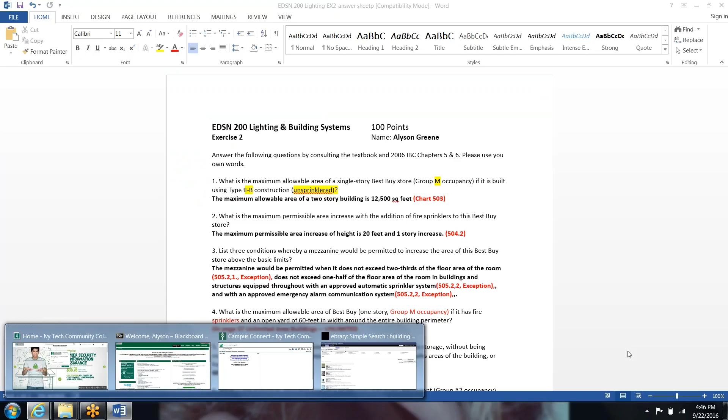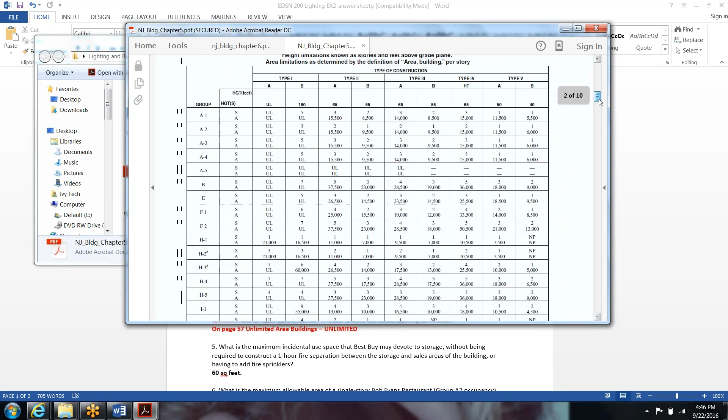So really the answer is just 12,500 square feet, and I used Chart 503. Chart 503 can be found in Chapter 5, given to us on Blackboard. You can see the numbers going up: 502, 504. Here's the actual chart, Table 503, Allowable Height and Building Areas.

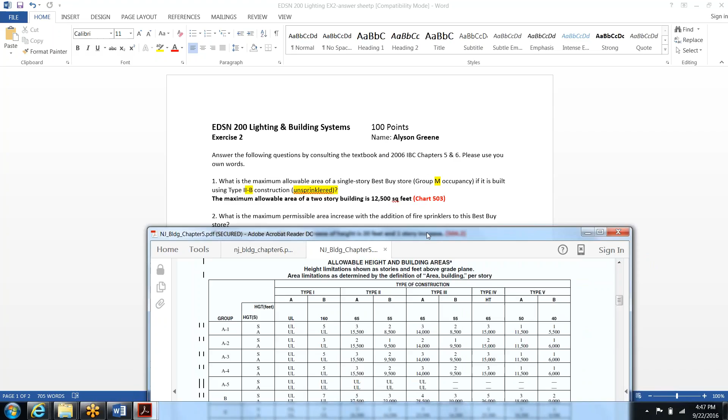So I'd look at my question: it's a single-story Best Buy Group M occupancy, built using Type 2B construction, unsprinklered. I'd come over to my occupancy group M, and pull it over to this column here with the 12,500. I got that because it's Type 2B, so I pulled that down and matched it up to where M came over, and there was my 12,500.

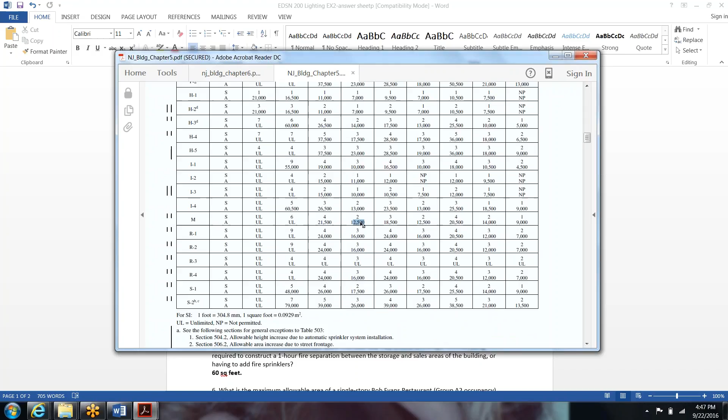On my digital copy of the Building Codes Illustrated, which I can get through eBrary from the links I gave you in a previous week, I'd come down to Chapter 5, Building Heights and Areas, since I'm working with Table 503. I'll give it some time to load.

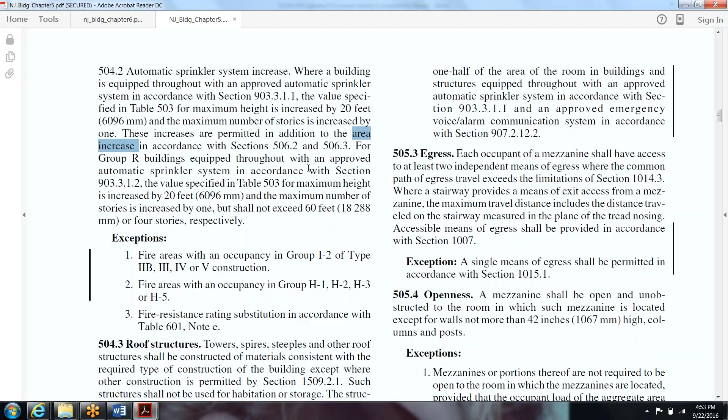So using the buzzword of the area increase, which was - if we go back to our question - what is the maximum permissible area increase with the addition of fire sprinklers to the Best Buy store? We'll follow along in our chapter book. Chapter 5, we see 506.2.

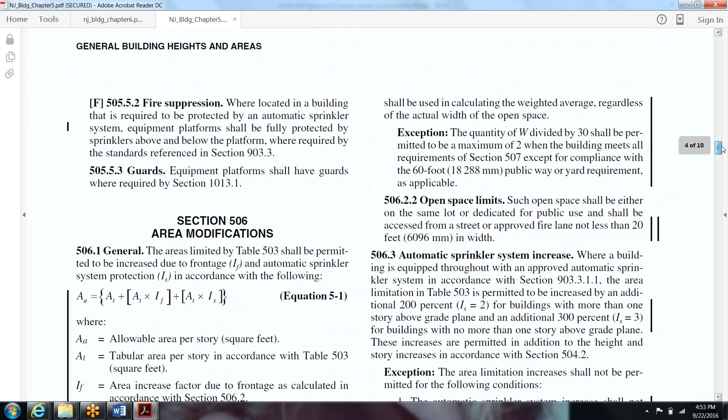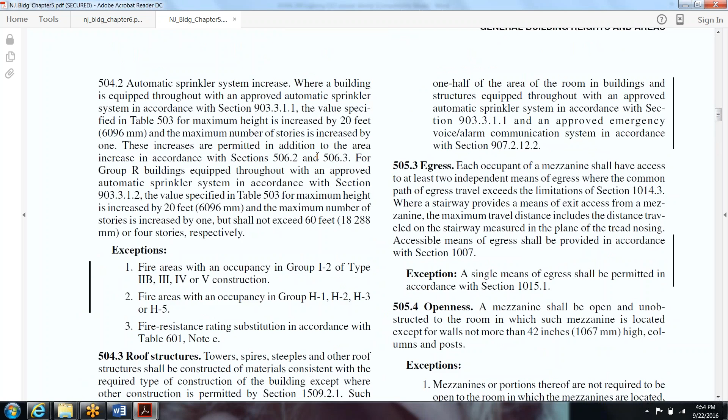So I'm going to follow through here. I'm only in 505.3, 505.4, so I'll keep going until I get to 506.2. So I see open spaces, then here's 506.3, and I think I just didn't read it - 506.2 and 506.3. So that's where my 506.3 comes into play.

If I'm scrolling down, it says, where a building is equipped throughout with an approved automatic sprinkler system in accordance with section 903.3.1.1, the area limitation is permitted to be increased by an additional 200% for buildings with more than 1 story above grade plane, and an additional 300% for buildings with no more than 1 story above grade plane.

So then when I see I have the words area increase, automatic sprinkler system increase, all in the same paragraph, and a bit of information about the stories given, it says for a 1-story building it'd be 300%. So I go back to look at my question.

All of that sounds like things I was looking for. So permissible increase with an addition of fire sprinklers to this Best Buy store, which was in fact a single story - so 1 story - the answer would truly be the 300% area increase, and these allowed for our height changes and story increases, but we don't necessarily care. It's still single story, so the true answer is 300% area increase, although all good information to know, and kind of a stepping through until we make it to the right section, which really is 506.3.

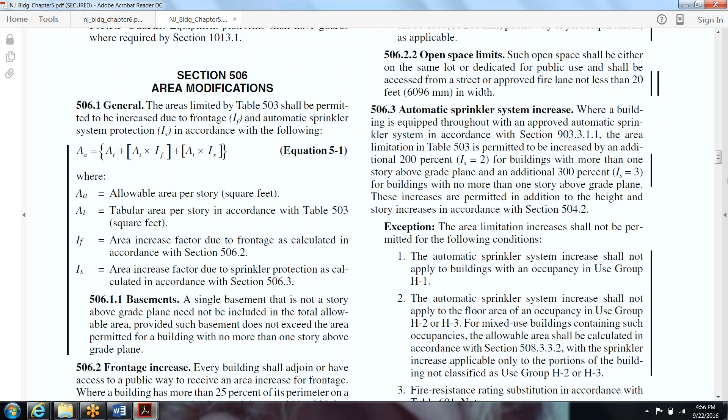In the announcements, I said the following questions can be omitted or the wording should change. So for 3, I said the wording should say: list 2 exceptions whereby a mezzanine would be permitted to increase the area. Looking then at my chapter 5, I'm hunting for the word mezzanine.

I can see that on 505, section 505 of the codes, mezzanines are clearly called out in bold font. And then I have a couple of different paragraphs—the first one says general, and the next one says area limitation.

So if I read back to my question, it says list 3 conditions whereby a mezzanine would be permitted to increase the area, and I said this really should be list 2 conditions whereby it would increase the area of the Best Buy. Coming back into here, I see area limitations, and then here I see exceptions to the limitation of area. So that's telling me there is an increase because it's an exception by which I'm allowed to have more area.

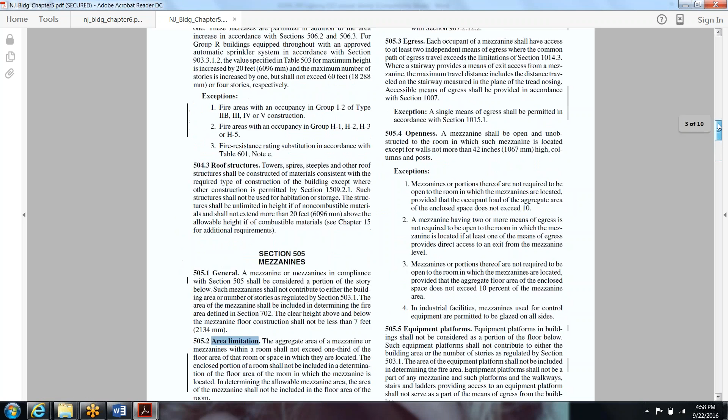Looking at the exception—sorry, I scrolled down past it. It's trying to skip pages on me.

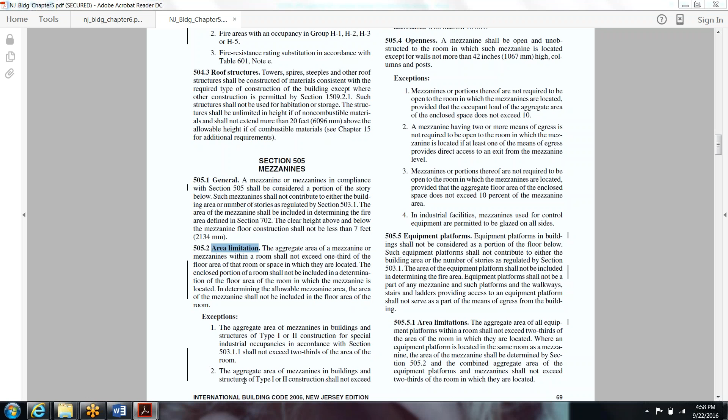I see the aggregate area of mezzanines in buildings and structures of type 1 or 2 construction for special industrial occupancies, in accordance with 503.1.1, shall not exceed 2/3 of the area of the room. The aggregate area of mezzanines in buildings and structures of type 1 and 2 construction shall not exceed 1/2 of the area of the room in buildings and structures equipped with an approved automatic sprinkler system in accordance with section 903.3.1.1, and an approved emergency voice alarm communication system in accordance with section 907.

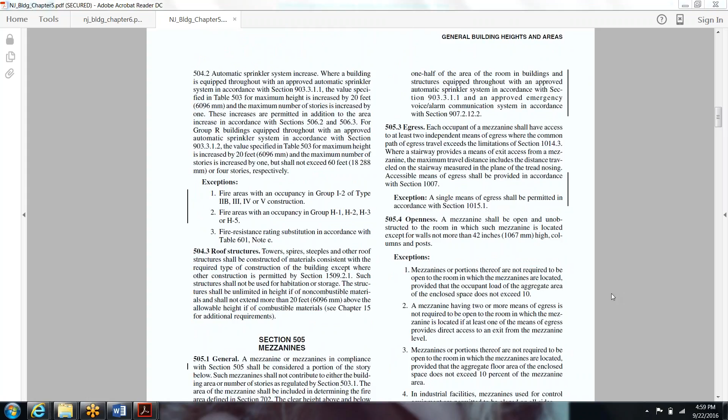So it's telling us these are the times in which there is an exception to this area limitation, when we have these special industrial occupancies in accordance with that section—it can have it, but shall not exceed 2/3 of the area of the room.

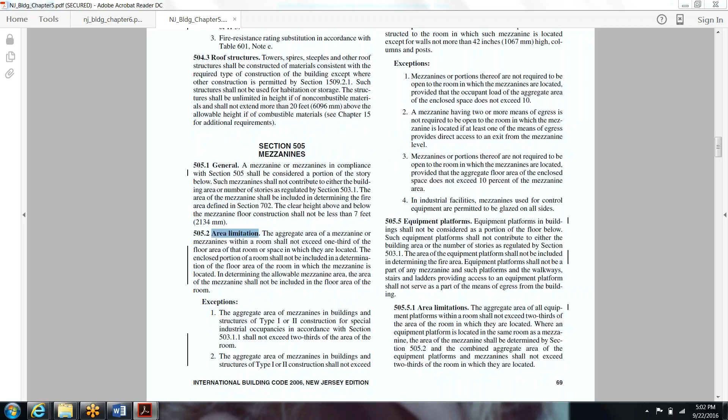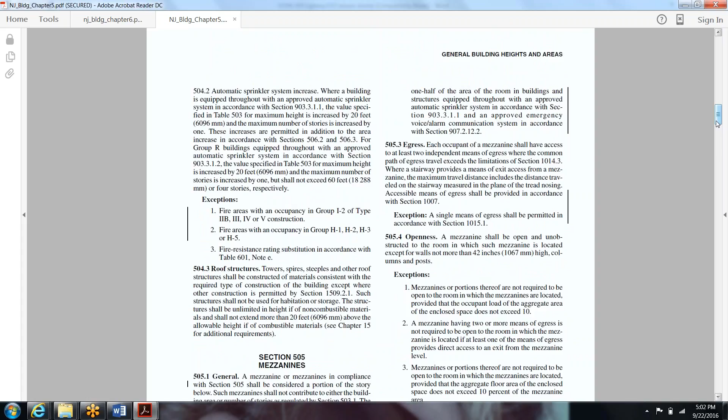And then for the aggregate area of mezzanines in buildings and structures of type 2 construction, it shall not exceed 1/2, I believe, of the area of the room in the building, but it has to be in accordance with an automatic sprinkler system, as well as voice alarm communication systems in accordance with section 907. So they're exceptions to the rule of size given that information.

So really I think it's clear, although I've been told even rewording it that way is not necessarily clear. So this is where your feedback is helpful to me in rewriting it for future people—not as helpful for you—but going forward I'm going to try and read everything in advance so you don't have to worry about it being this impractical again.

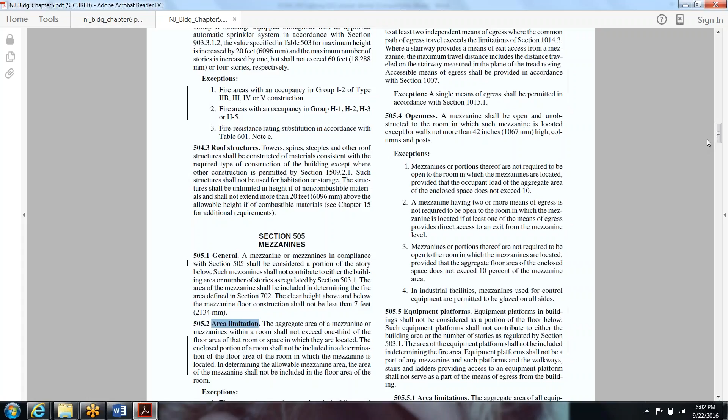So there is where we get the answer for question 3, and I had hoped that at least changing the question you'd try to struggle with it a little bit more and possibly end up with the right answer.

So question number 4: what is the maximum allowable area of a Best Buy one-story M occupancy if it has fire sprinklers and an open yard of 60 feet in width around the entire building perimeter?

The answer to this was easiest found on page 57, so let me write this in here—you can see my screen—of the Building Codes Illustrated. So sometimes it's easy enough for us to use our charts, and maybe it isn't, it depends on the person or how many times we've been through it.

For me, I can read chart 503 and kind of deduce from this question right away to find this material. But when we get into things with exceptions, incidental use is pretty hard, with the amount of information given to us about fire sprinklers and additional information on increases in widths, whether it be yards or areas of way outside a building.

The more pieces of information added into the equation for increasing the size, the harder it becomes to read it directly out of our chapters. So we want to use that Building Codes Illustrated more and more.

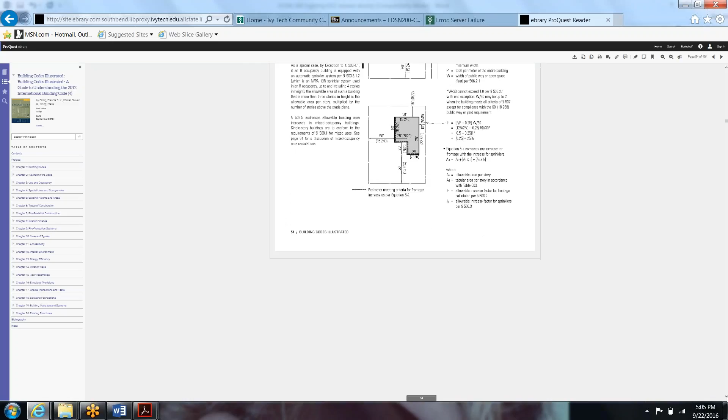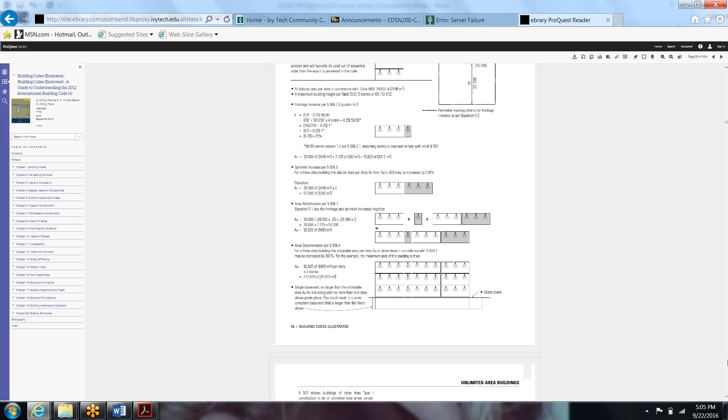When I go into page 57 of Building Codes Illustrated, so that's my digital book, and right now I'm on page 50, 52, 53, 54, 55, 56, and while I'm flipping through, just see all of this information it's giving you. It's helping you out with sprinkling.

So here's 57. So here I'm looking for code words or very big prompting words within this text. So yard, that was one that we could have been using as a significant word we don't see very often. And here we see notes. Yard, permanent open space around the sides of a building. We refer back to our question and see what is the maximum allowable area if it has a 60-foot open yard all the way around it, meaning the entire building perimeter. Here, permanent open space around the sides of a building. So that's a good indicator.

We pull this information over and it says 60 yards. Now our question is in feet, but I know that yards are greater than feet, so it falls under these categories as being at least within the realm of 60 yards or more. So if we have an open area of 60 feet in combination with our building, we can come down here and find our occupancy. We also see up here it's sprinklered or unsprinklered. So for us it's sprinklered, 60 yards, which under that falls 60 feet. And then we find our occupancy, which is M, and we can pull it over and we see that in reality, given those parameters, it would in fact be unlimited.

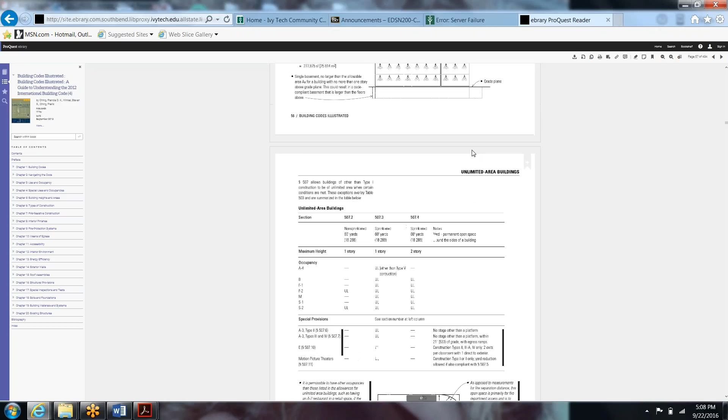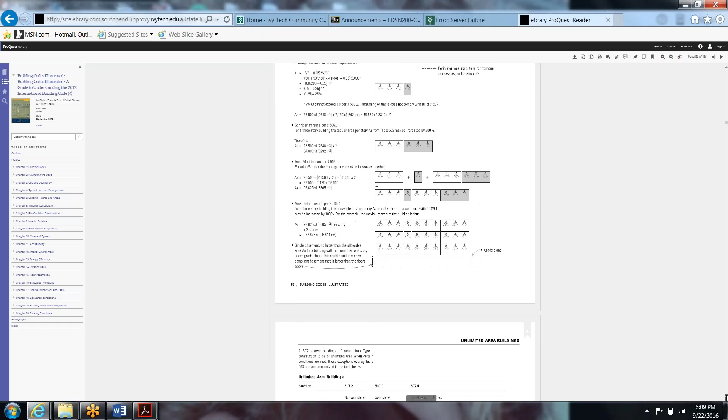So this is where we'd find it, and we would have found it with the question flipping through. So unlimited area of the buildings is here, but one page before that we have our area modifications, and it's due to sprinklers. The area is modified given sprinkler information, and then also given sprinkler information in combination with added yardage, or by yardage I actually mean feet and yard space. So all of this follows in the order that it's laid out in the chapters of our building and lighting book.

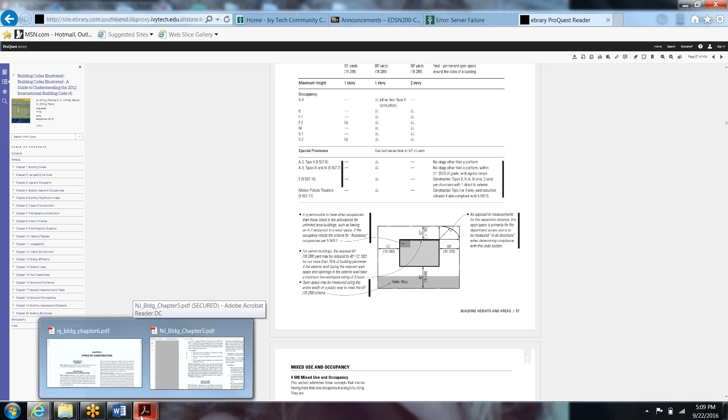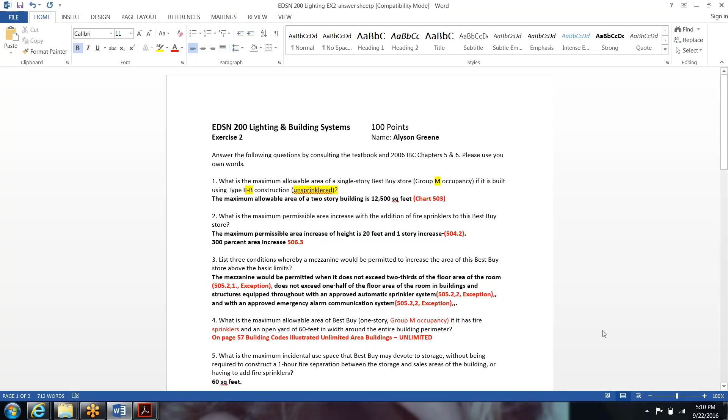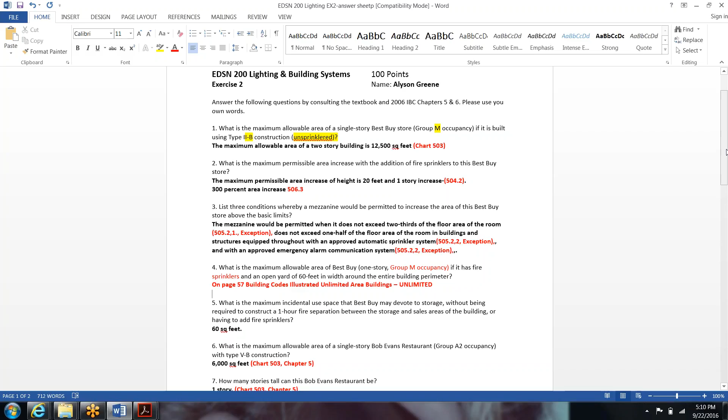For question number 5: what is the maximum incidental use space that Best Buy may devote to storage without being required to construct a 1-hour fire separation between the storage and sales areas, or having to add sprinklers? I have an answer to this, but I think that's way beyond the realm of what you would be able to find easily. So I decided to omit it from the grading this week, and I'll look at where we were all at. None of you emailed me except for 2 people who contacted me about the difficulty of it. I heard a lot of people talk about the difficulty of the project with each other, but not their instructor, which isn't helpful for me in being more lax on the grading and changing it to be a better assignment for you right away so you don't have to struggle that large amount of time.

So we omitted 5. Question 6: what is the maximum allowable area of a single-story Bob Evans restaurant, Group A2 occupancy, with VB construction? So this is another find-the-chart and follow it according to its occupancy and construction type. VB, Group A2 occupancy.

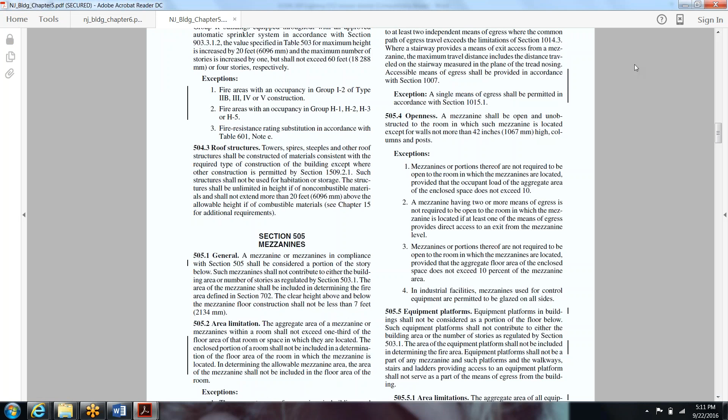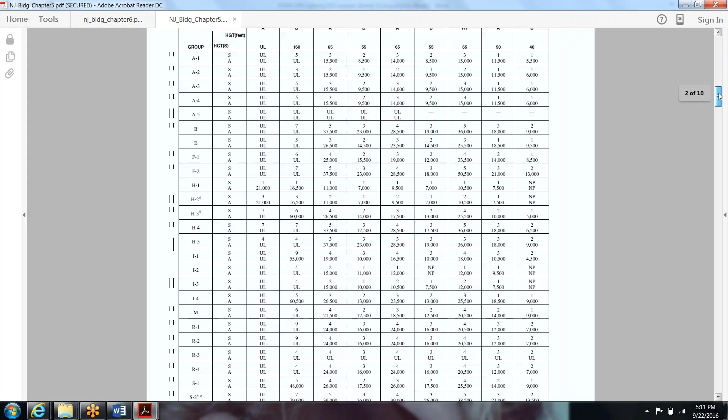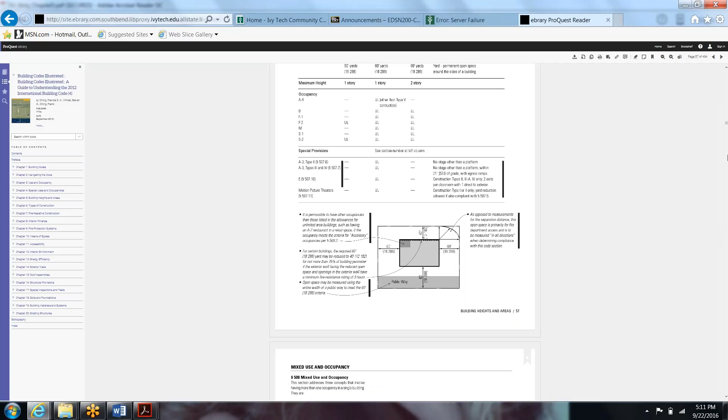So I could refer right back to my 503. If I wanted to, I could review my Building Codes Illustrated way to read this. So A2, and pulling that over, and V type B, so A2 VB equals 6,000 square feet. And again, if I'm having difficulty and I want to review why that is, I can pull up my eBrary book and go back to where it reviews the coverage of Table 503 and how to do that.

So then it says, what is the maximum allowable area of the single-story Bob Evans restaurant? Oh sorry, I'm reading the same one. You can tell I'm ready for my vacation.

So how many stories tall can the Bob Evans, that is A2 occupancy, type VB construction, be? I would go back to my chart, find where that information lined up, A2 over type B, and here we have the regulation of stories above the 6,000, and it says as-is it can only be 1 story. Remember, that modifies when we add sprinklers, and it can also modify given additional space outside the building, like a yard of a certain size. But for now, all we know is this information, so we pull each of those rows and columns together to give us the 1.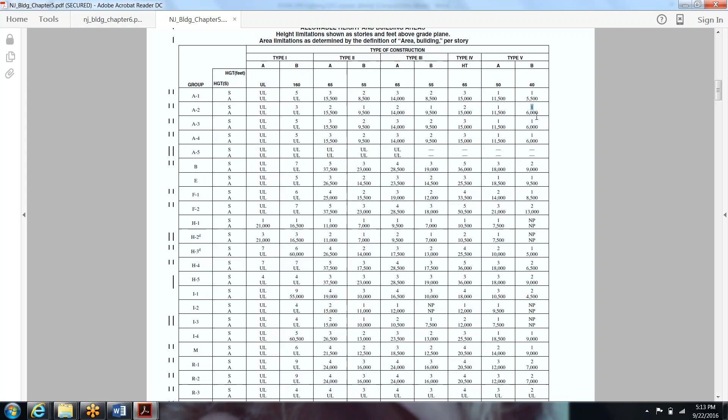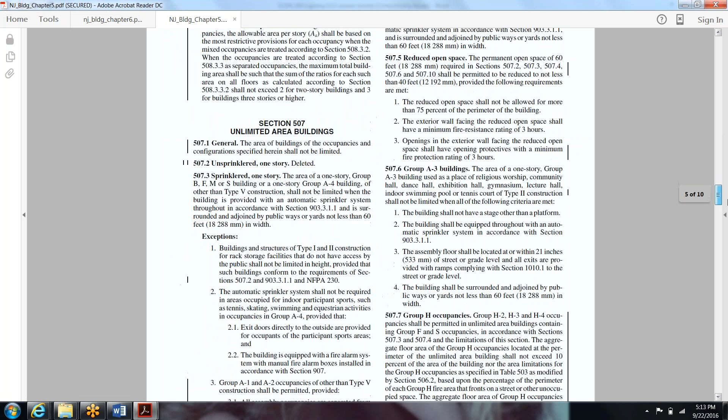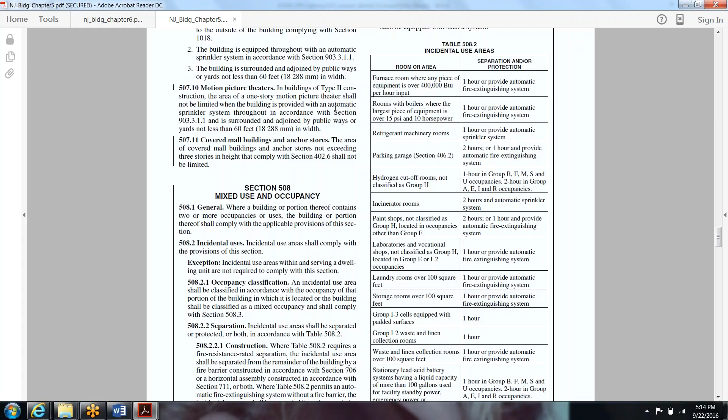Moving forward, we have: what is the maximum size furnace that Bob Evans can install in a mechanical room without construction of a 1-hour fire separation or adding sprinklers? So I utilize chart 508.2.5 in chapter 5. If this is 503, I'm going to move until I start to see the number 508. Here I have this exception, 508.2, furnace room, where any piece of equipment is over 400,000 BTU per hour input, then we have the 1-hour provided automatic fire extinguishing past this size. So this is in fact the maximum size furnace that can be used before that requirement is needed.

Number 9: what is the maximum allowable seating area of school field if it was a building using type 3 construction? I think this just got confused in my delivery to you yesterday. Really I wanted to get rid of it, and after talking with enough of you I found the correct answer myself doing the sheet. I think we needed to get rid of the word seating. I think on the website I changed it to occupancy, which was unclear. So get rid of the word seating.

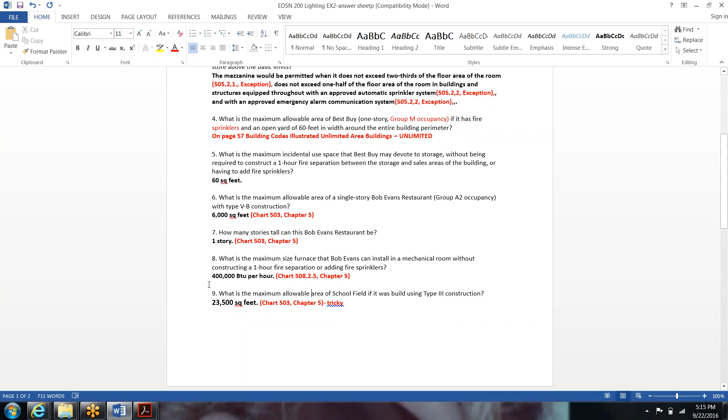So what is the maximum allowable area of school field if it was a building using type 3 construction? We would just be finding our occupancy type and pulling it over to the type 3 construction on our 503 chart. I said it was tricky because of the wording, but it just needed to be cut out, all that tricky wording. I don't think it's necessary, take it back to the chart for face value. I'm not going to cover every single one of the 503 charts. I think they're straightforward once we have enough information.

So for number 10, it had just flashed an answer and then the answer disappeared, most likely with the recording. I backspaced it because the original answer in the master key wasn't taking into account the individual floor square footage. It was using some type of division that's unnecessary, and I think a little archaic given the newer codes. So that's one where I want to look at your answers without being prompted, using chart 503 and the type of occupancy and some other information to figure out the answer. But I do feel like it was straightforward. I went through the true answer with 2 or 3 students and they all got the same thing without me giving them the answer.

Number 11: what construction type would allow the greatest possible area for a 3-story prison occupancy without fire sprinklers?

So back to question 11: what construction type would allow the greatest possible area for a 3-story I3 prison occupancy without sprinklers? This is again using chart 503. So a 3-story prison I3 without sprinklers, greatest possible area. I'd find I3, and then at least 3 stories, but here I have an option for unlimited area and unlimited stories. So really the greatest area that I could have would be if I were to use type 1A for I3.

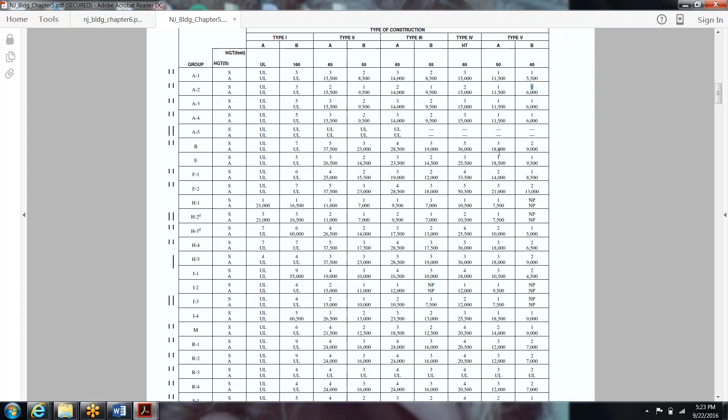For 12, which construction type would you recommend for the 10,000 square foot single-story Drive and Shine car wash, group B occupancy, without fire sprinklers or other allowable increase? So it's at least 10,000 square feet, group B occupancy. I come over from my type B, and I know I need at least 10,000, so I can't use 9,000 - it has to be greater than that. It's 10,000 area. Then I have my type A for VA, which brings me down. So back from here, B over to VA, because 18,000 is great enough - my 10,000 falls into it.

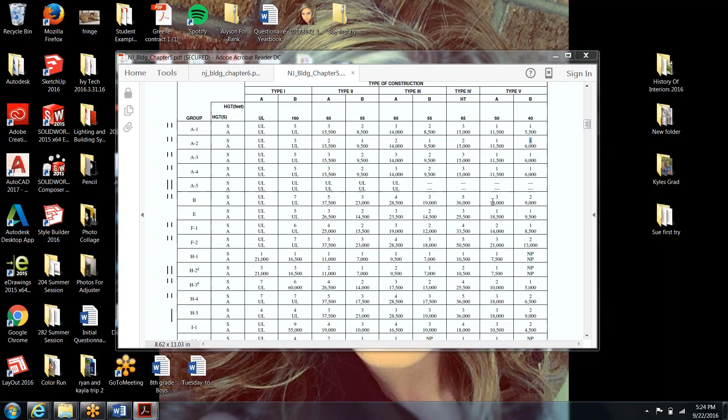And then we could have upwards to 3 stories if we needed to, but it covers everything we need. So the answer is B. Pull it over, find the type that allows for at least up to 10,000, and for the stories we have to cover, which is only 1, so we can choose VA as our answer.

For 13, besides open space on the property, what other open space may give Drive and Shine an area increase? I have that being a mezzanine, and I got that from page 53 on the Building Codes Illustrated, which if I go back to my eBrary book, here's 53, and it talks about mezzanines and shows how that can add to the space we're using. I also could have gotten it through the chapter, looking at the increase due to mezzanines just by using chapter 5 and reading through it. We could logically deduce there were only 2 options to add space outside of sprinklers and the yard, which would give us mezzanine as the final option of things mentioned in the chapter. But it does a good job of outlining more clearly for us mezzanines on page 53 of the Building Codes Illustrated.

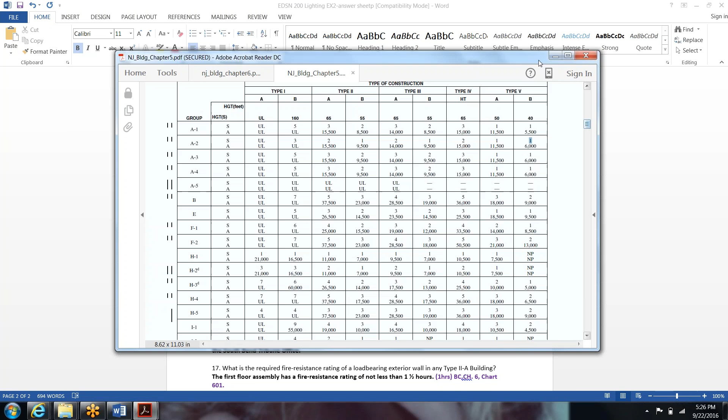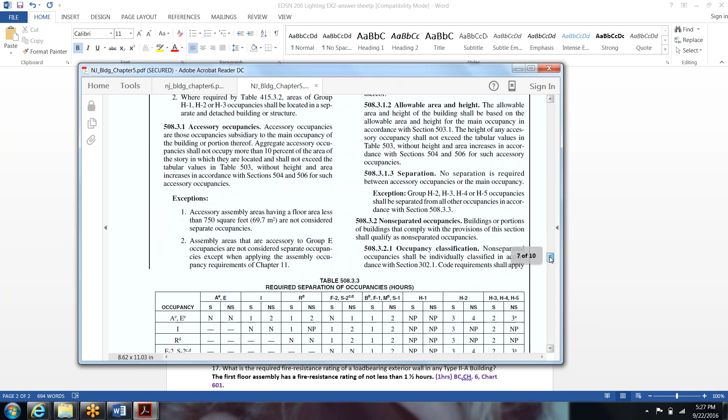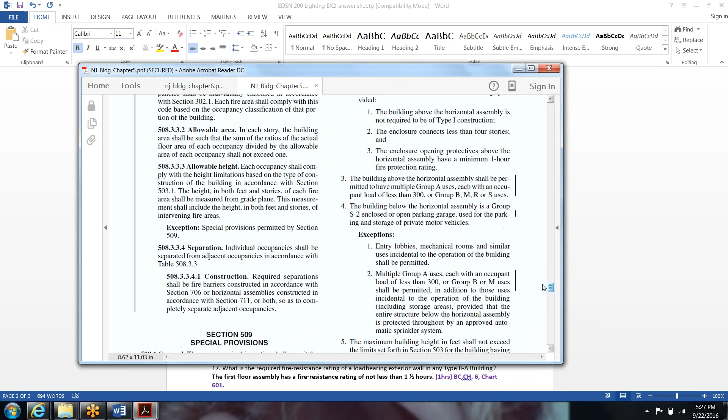So then for 14, what would the required fire rating be to separate a rub and dry cleaner's S1 occupancy from a Midas muffler shop H2 occupancy if they were adjacent to one another in the same building? I would pull up my chapter 5 - I had said 508.4, so I'll pull down until I get into it. I know that I want to use this chart. 508.3.3 for separated required separation of occupancy in hours. So using the chart, here's where I can see I have S1 occupancy, and I want to pull it over to figure out the fire rating until I hit H2 occupancy for required hours of separation, and here I have 3. That's how I use the table to find it.

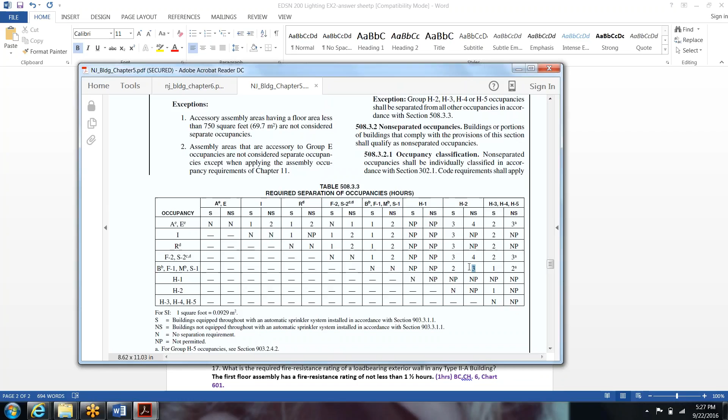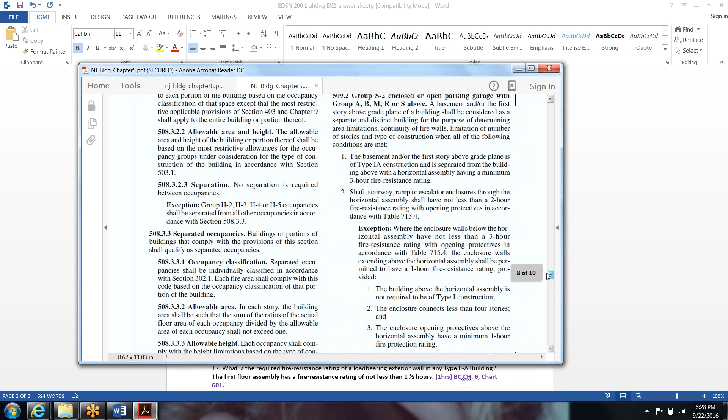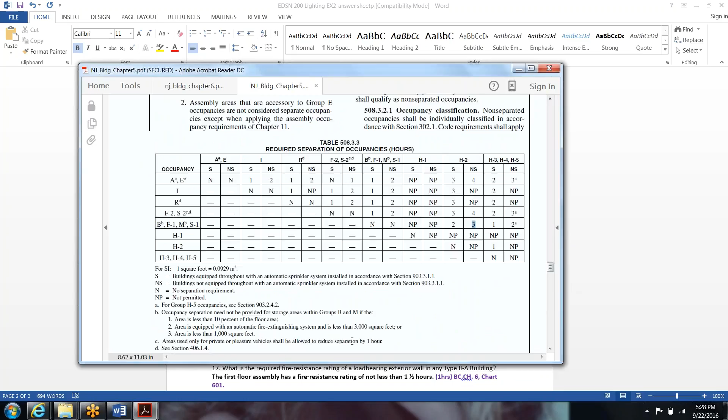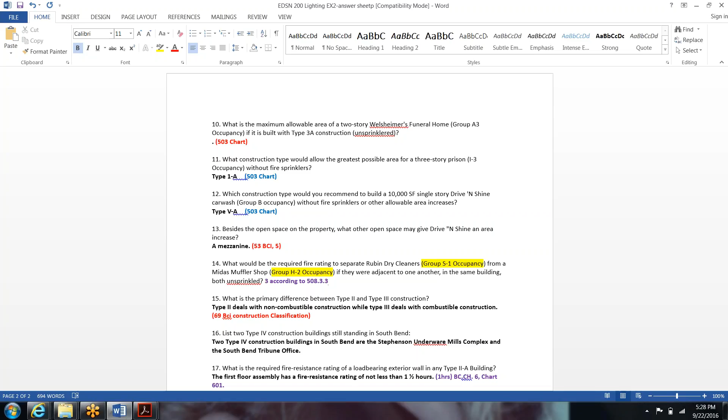But I do feel like there was a section in here I'm just missing, 508.4, 508.3, maybe I totally made it up - individual occupancies should be separated from adjacencies, 3 3 4. I must have totally made it up, or there's something I'm missing, but really you just needed that chart, and I probably just meant 508.3.3. So I will go ahead and change it here so you can see that change - 508.3 chart, and you just pull the columns over just as we did in 503.

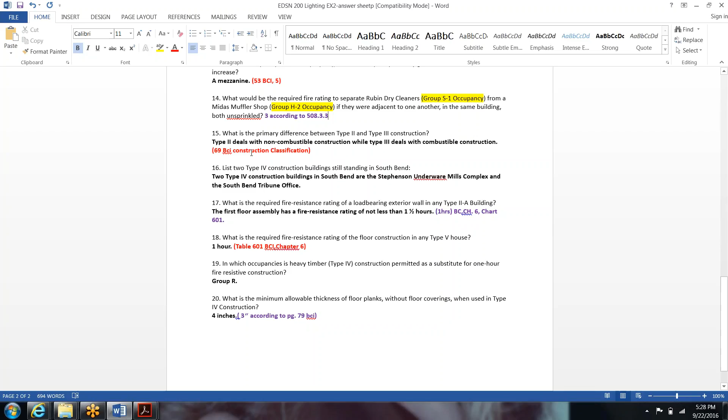What is the primary difference between type 2 and type 3 construction? Those I think you could find easily by reading your building codes. I had 69 in Building Codes Illustrated, construction classification, and then there's a number of buildings. So here's a few listed on my screen which were originally offered, and then the South Bend Tribune office is in fact one.

I wasn't necessarily looking - again, I didn't write the original, but when I had done this one, the instructor didn't necessarily say this, but when I got my feedback back, they're looking for materials that qualify a building to be considered that construction type. So the information on those materials can be found in the Building Codes Illustrated book. It was more of a guess by looking at the exterior of the building and saying I believe it's made of those materials and therefore has that classification. I had a few students give me some guesses, and a couple who were indeed correct. Some of us don't live in South Bend, so I might toss it out altogether or use it as extra credit for things that were way out there.

In 17 - what is the required fire resistance rating of a load-bearing exterior wall in a type 2A building? This had been an original answer a long time ago, but the codes have since changed. My answer was 1 hour according to the Building Codes Chapter 6, Chart 601.

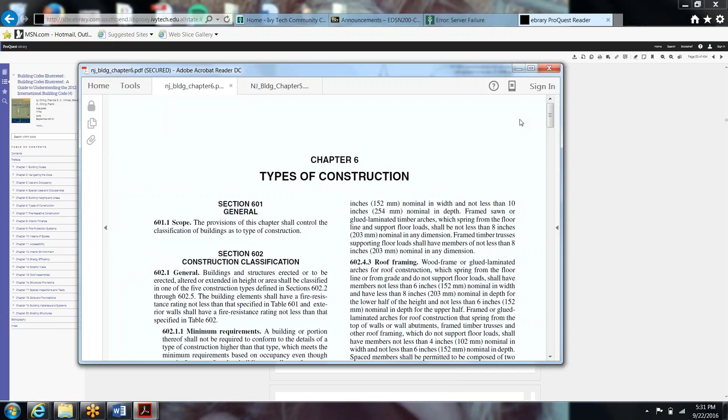So I scroll down until I find table 601, fire resistant rating requirements for building elements. Then I look back at my question and say resistant rating for load-bearing exterior type 2A. So I want to find bearing walls exterior type 2A, and here I come up with 1.

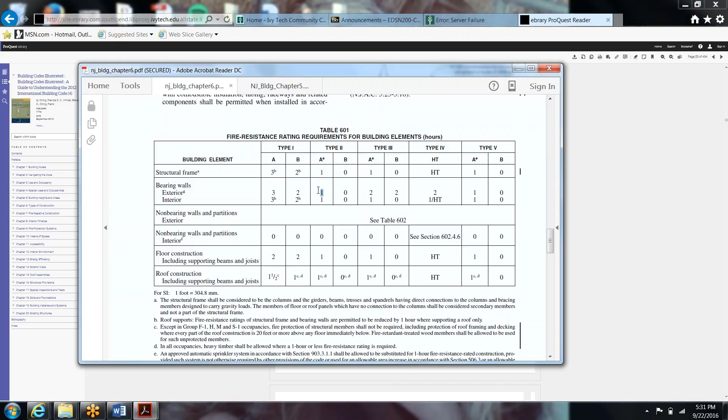Question 19, there were multiple answers to this. This is just one of them, and that one I felt was all over the place. So in as much as I'll be accepting quite a few answers, your Building Codes Illustrated book gives you a couple. So it doesn't have to just be one answer.

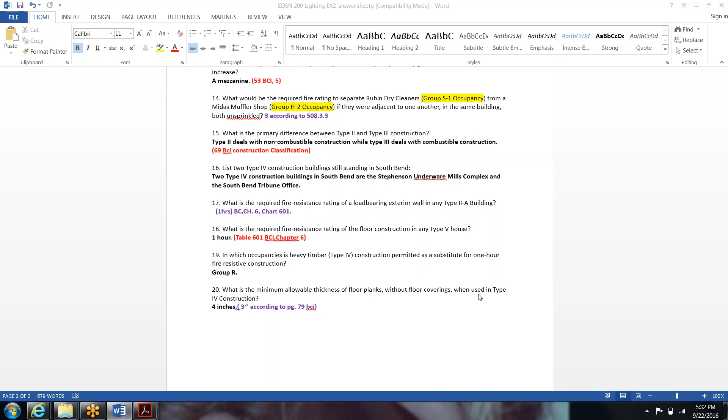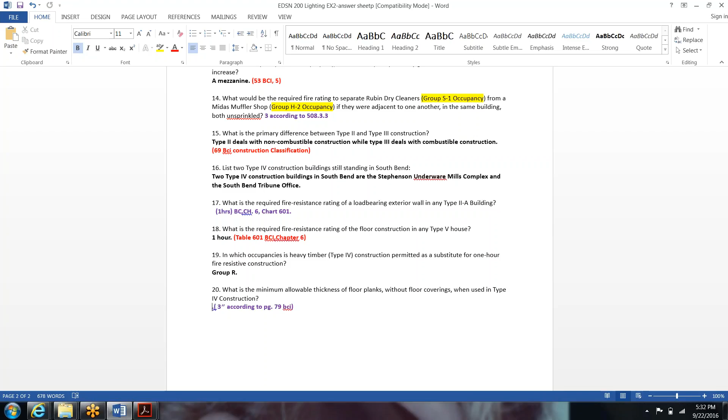And then type number 20, what is the minimum allowable thickness of floor planks without floor coverings used in type 4 construction? Here I had an old answer due to nominal increases or decreasing, where we used to think of like a 2x4, and our teacher used to say it's not truly a 2x4. So I think now they specifically say the nominal 3 inches, according to page 79 of our Building Codes Illustrated, which is our digital book.

So I can find page 79. And in here is where it talks about the 3-inch thickness.

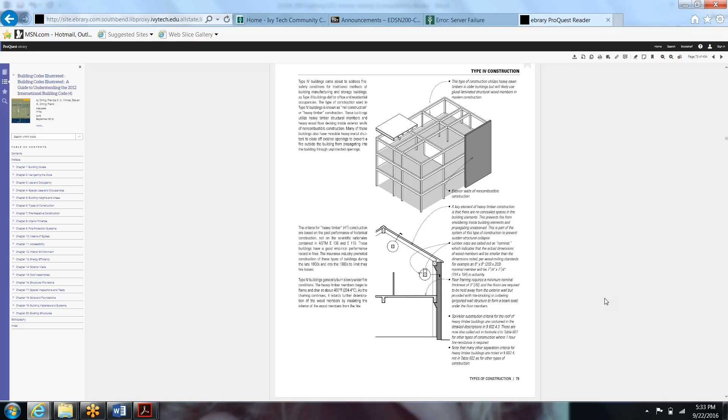All right, so that covers our homework assignment. I'm going to spend about 30 minutes more just going over a really quick overview of our PowerPoint for this week as it relates to walls, stairs, and assemblies.

So now I have opened our 200 Lighting and Building session 5, floor ceiling assemblies, walls, stairs. This will now only go for the 3rd edition of our Lighting and Building book, so any 2nd edition answers are not going to cut it for the quiz. I'm only testing now to the 3rd edition. At this point we should all have the 3rd edition. If not, possibly come into the lab and borrow a friend's while still working on getting your own 3rd edition.

I did upload the chapter for this week, so chapter 5 is available. That's another option, but that option's only going to run for 2 more weeks after this, where you can use the digital copy of the book because I can only scan so many copies.

So floor assemblies and ceiling assemblies. For floor assemblies, I'm going to take the level of my voice down because there's another class going on. For floor assemblies, we have the use of them for structure support, fire control, thermal qualities, humidity control, airflow, and acoustics. It's an opportunity for us to hide the plumbing, certain parts of the electrical, and the mechanical. Things we have to consider when picking different flooring materials and assemblies are the amount of deflection, vibration, and load types.

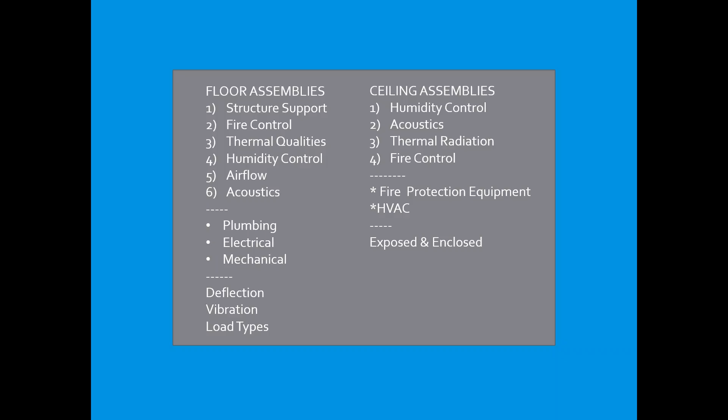They can be exposed or enclosed. Oftentimes, the amount of money it takes to do an exposed ceiling well will be equal in cost, if not more expensive, to that of materials such as ceiling tile systems that can enclose the ceiling.

So flooring concerns. For flooring concerns, residential and contract, we have the idea of using tile over a floor that doesn't have proper humidity control. I used to have that all the time when I was working with clients.

A lot of times you'll get into a bidding situation when you're in contract design, and you might have a flooring manager or a company that you use who's trying to bid against a certain job. And the client is trying to get the numbers down, so they want people to come in under. And oftentimes what the contractors will do is they'll pick a thin set grout that's not appropriate for the application, or they won't do proper humidity testing and really temperature testing before they install the floor.

There's little corners that get cut in order to bring the cost of their work and labor down, and we end up with cracks like in the upper left, or we end up with moisture issues like in the upper right.

Other things I've seen with flooring concerns, very popular now, are the cement floors that are painted or stained concrete. Something people don't consider is the importance of ordering your building materials and how they're laid.

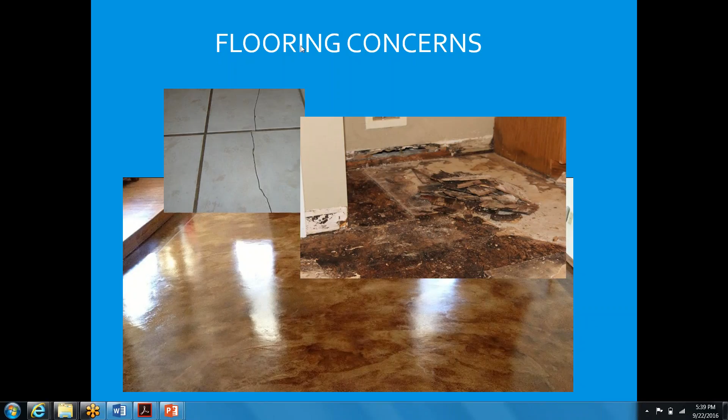Steel floor assemblies. Here I have an example of a steel floor assembly at the top. Steel frame buildings usually employ steel decking, precast planks, or concrete slab floors. The steel beams support the decking or precast planks, and in turn are supported by the steel girders, columns, or load-bearing walls, which are parts of the steel skeleton frame.

Here we can see the sheeting of the steel on top, and the overall rectangle is the steel sheeting. We'll have support members running horizontally, as well as vertical beams that are thicker. We have a perimeter member, which is the same as what they're talking about with beams over here.

In the picture below, we can see the beam running around the perimeter of the space, and then we have our girders supporting the weight of the beams, and our joists that fall between each of the beams. Sometimes we'll have a few triangle supports and connectors at each of them for added structure.

Here's another reiteration of that. We might have mesh applied in here as well that helps with fire spread prevention. So different pieces go in - we'll have shear studs in combination with our joists, and here's our sheeting and the universal beam, which was seen more clearly above.

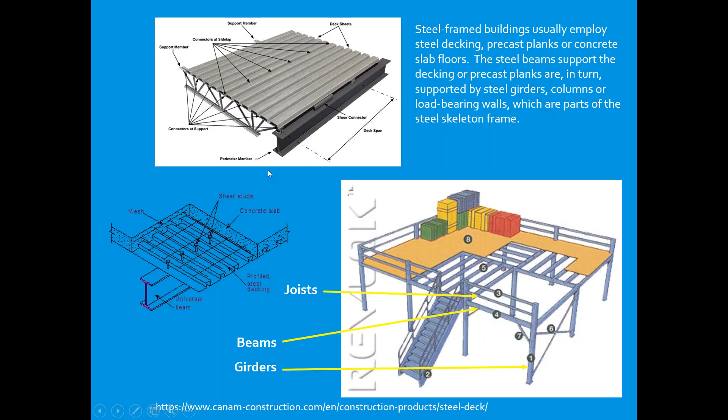I gave you a link to canam-construction.com where you can go and look at all the product specs that were shown here and how the pieces go together. They also show a number of applications that I don't think your book illustrated very well.

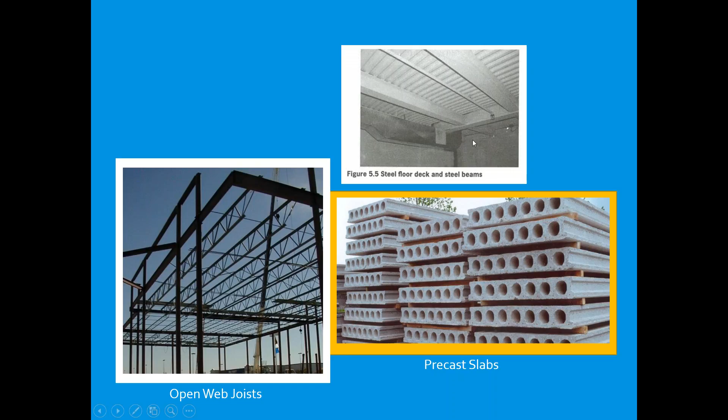Here we have open web joists and precast slabs. Last week we saw precast stairs or other precast parts of the building that are craned into our work sites. The precast slabs work in a similar way - we'll run steel through them and connect them in a structure, but that way we don't have to pour the actual concrete on site. Here's a steel floor deck and some steel beams from underneath.

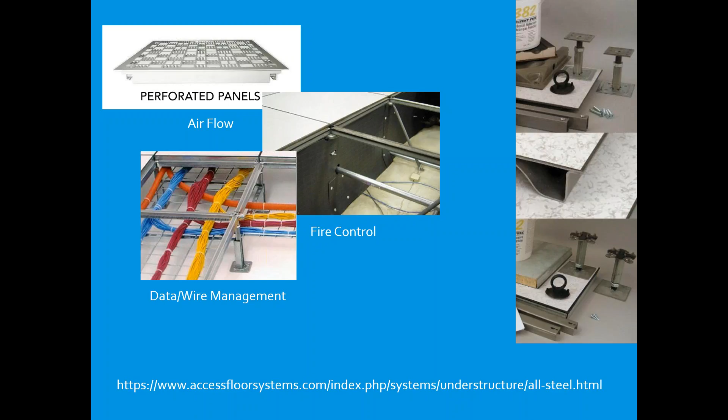I worked with a furniture dealership that dealt mostly in panel systems in offices. Offices are definitely made up of this because of the plenums running beneath them, multi-floors that have to have this much data and wire management on each floor. So how do we position the furniture also over these areas where we need heavy access, in a way that it's not going to make an electrician charge us an arm and a leg every time?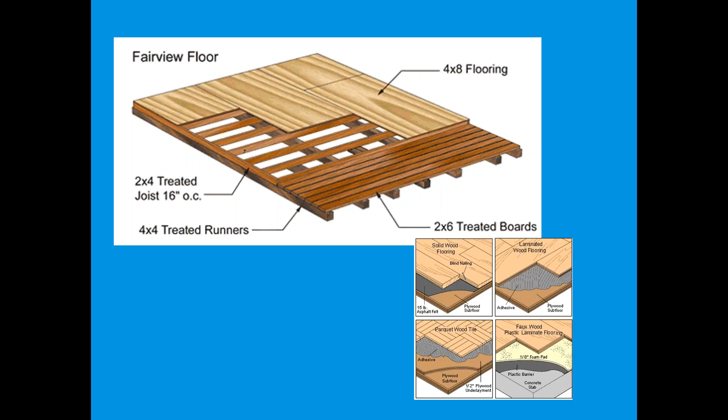So it all depends on the amount of money spent on a project, and the amount of underfoot softness that's needed. For example, when we're laying linoleum or vinyl, we might put pad or we might do direct glue down—it depends. Now if it was a nurse's station, we might have some type of padding because they're on their feet 24/7. Or if we're doing heavy cart rolling, we might have some type of padding to prevent the friction that could cause our floor to peel up or break due to not having enough bounce in it. Other times bounce can be bad and it lends itself towards cracks, like with our first pictures of tile.

Ceiling assemblies—so plenum between the floor and ceiling. I know this is a very bare slide, but I felt like it was fine for what it was. I had originally had a bunch of pictures, but I want to leave it at this because we're going to come back to it at a later time.

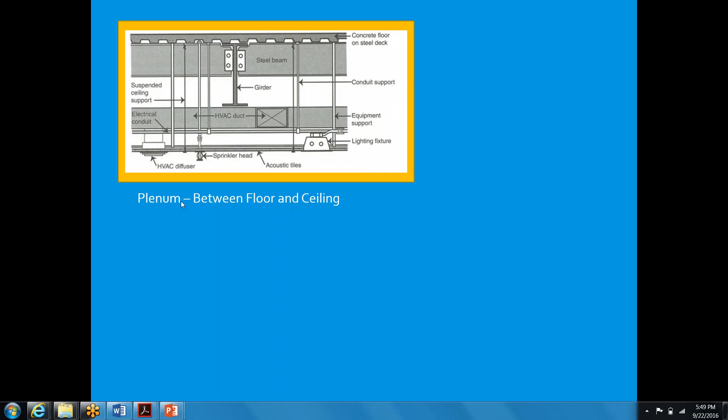So ceiling assemblies can be decorative. They don't have to be a ceiling plenum that's easily accessed. Sometimes we have purely decorative ceilings, in which case we have to think about what materials we're applying. The more permanent, the less access we have.

We had that in another building where a designer I worked with, we took it from ceiling tiles to plaster, or drywall. And then they found out that what was above in the plenum, they didn't have a good access point after doing that, but the contractor never said anything, so we had to break through that drywall not more than 3 months after we set it. So it was bad planning on both the designer and the contractor side. He should have let us know a little bit more about that plenum, but it happens.

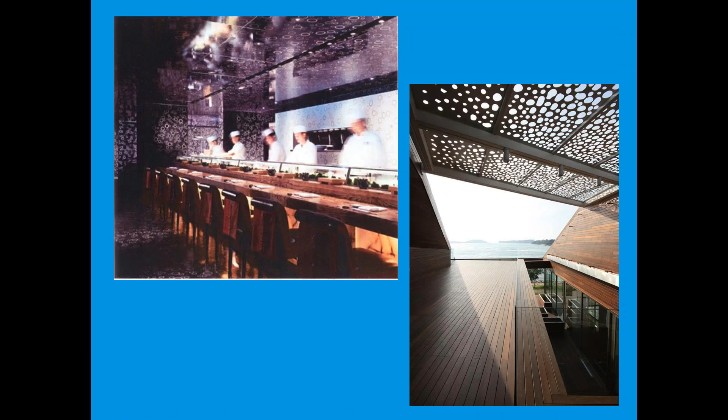And here's just some more options for ceilings. We have angles and bends, we have plaster, we have drywall, we have tiles within tiles, so these look like individual tiles, but really this whole set is one piece. Wherever you see the true thicker connections is the entire size of the tile.

Here's basically a lining installation that functions as one large metal tile that's connected at the corners and screwed directly into the wooden ceiling.

So concrete floor systems. This I thought was interesting. Here we have the waffling that's used for concrete ceilings and sometimes floors, and I think they've done a really good job. Waffling used to be an ugly thing used mostly in garages or storage, but now they've taken it and completely contemporized it, adding in abilities to weave throughout the HVAC, the lighting, the plumbing in a beautiful way.

That makes this a very comfortable working space. Now a lot of that has to do with color selection. They kept it fairly neutral, not that stark white. But I think it's a really cool concept.

So these are the little details that the ceiling is the most forgotten about. I'll say that I'm not teaching advanced this coming spring anymore, but if you ever want to run your ceilings by me in points of interest, I'd love to do that with you, because that's where we get the most fun going on in a space, to have a variety of ceiling heights, a variety of ceiling materials, some trays, some ceiling tiles. We have to be thinking about the use, the accessibility, where it's practical in a one-person office to have drywall, but then in a large open office to have tiles.

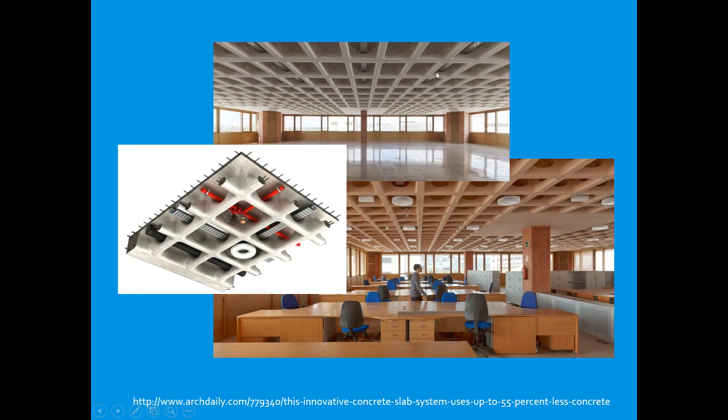But the tiles don't have to be boring. It can be something like this waffle system where we almost get rid of that plenum space and are creating a floor support in tandem with our HVAC support.

So here we have just the different types of joints used in our concrete floors. We have saw cut or tool, keyed and doweled. Sometimes if we really want to reinforce a joint, we can apply a metal to it.

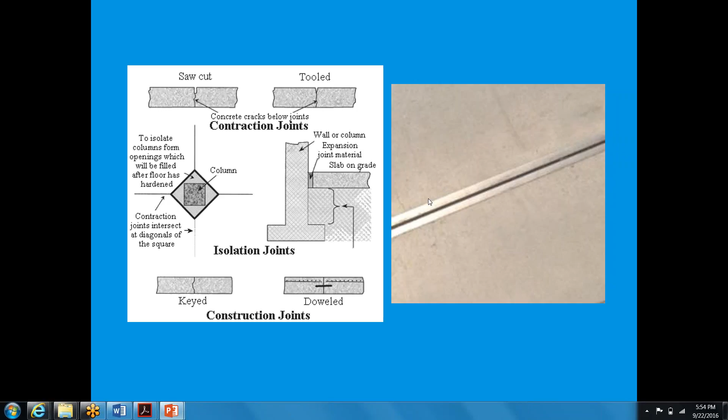Stairs. So I'm going to breeze through stairs, I don't have a lot more time left.